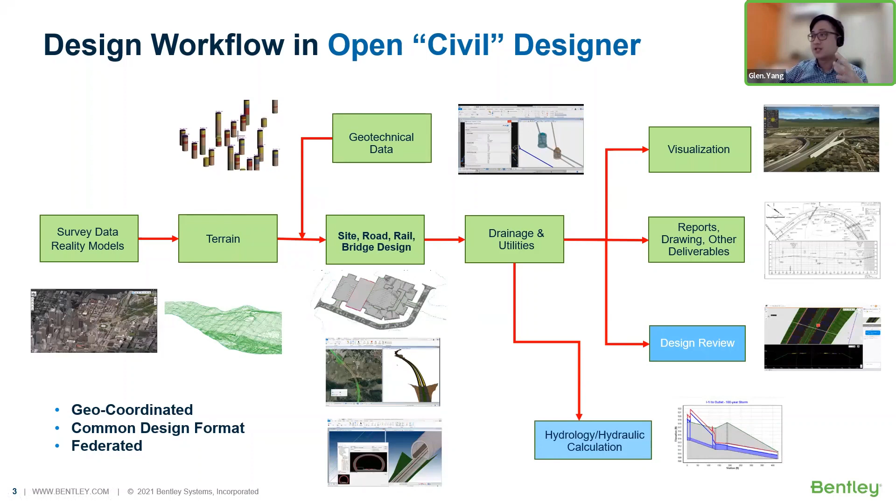But from there, of course, it comes into visualization, where you can use things like LumenRT for rendering, pretty fast rendering. We will be able to create reports like drawing reports and other deliverables that have a bit of automation inside, which really eases the workflow of everything. Design review, and for drainage and utilities, some hydrology and hydraulic calculations.

Okay, so maybe I'll just talk about what I do specifically and the workflow of drainage and utilities. So once the road terrain has been created, utilizing the corridor models that we have already designed based on the site, road, rail, and bridge design, I will be able to add in some utilities that can be imported through 2D or 3D context line strings to create them into utilities.

Next is to create a drainage network design. From there, we can do some hydrology and hydraulic calculation. We not only analyze the drainage network design, we can also let OpenRoads design it for us. So if, for example, a certain pipe is at full capacity, does it increase the pipe sizes? Does it reduce or change the inverts of the pipes, which will allow us to extrude the nodes out, the 3D portion of the nodes?

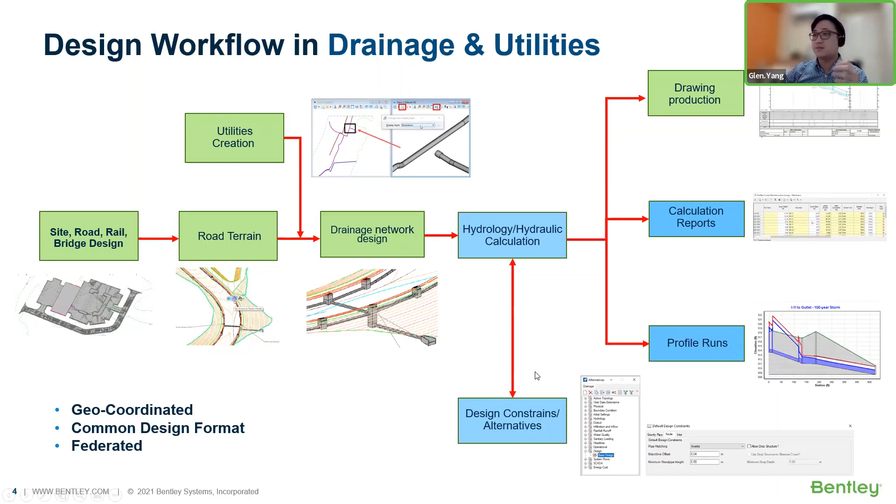So it's pretty interesting when we look into the technologies of this type of workflow when it comes to modeling itself. We can set specific design constraints to change the way we want the entire network to be laid out for us.

So with the drainage network, it's pretty simple to create. That includes adding nodes and conduits, and this utilizes the workspace that we have, sort of libraries that you can add on the spot once you have downloaded them. From 2D inputs, we will bring out 3D outputs as well, and they can be extruded from the middle line. The cells have a smart technology where they're able to populate and extrude themselves.

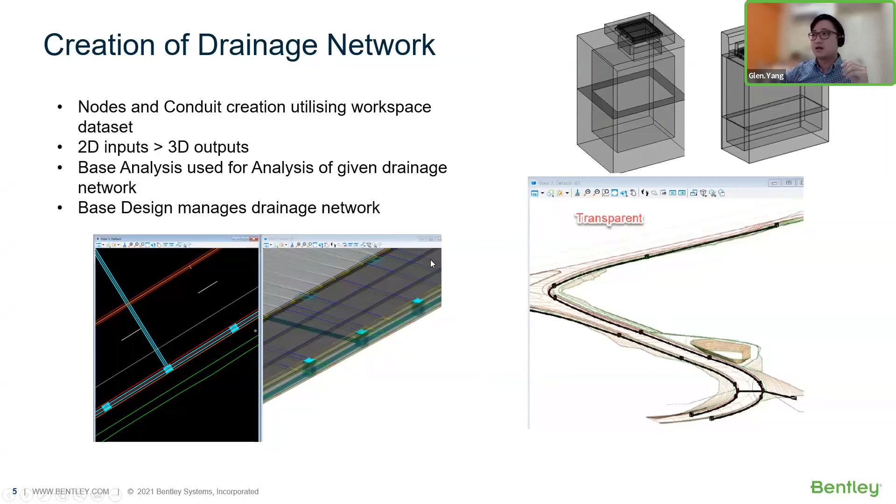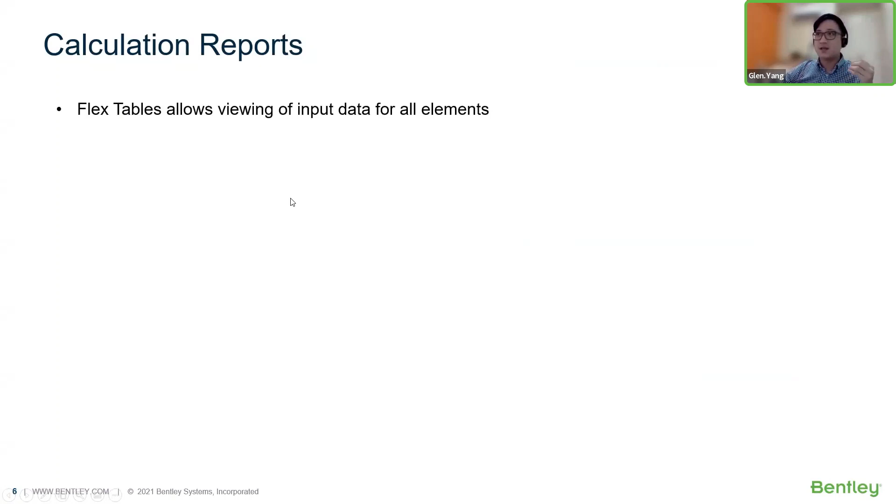Yeah, sure thing. Okay, so for drainage and utilities specifically, we are able to create calculation reports, pretty simple, and they are all populated out for us. We don't even need to add any additional input to them. We can also control the entire drainage layout through these tables. So it is really interesting how the software we have is able to manage your information and lay it out, and there are different ways and workarounds where we can handle that information and edit it.

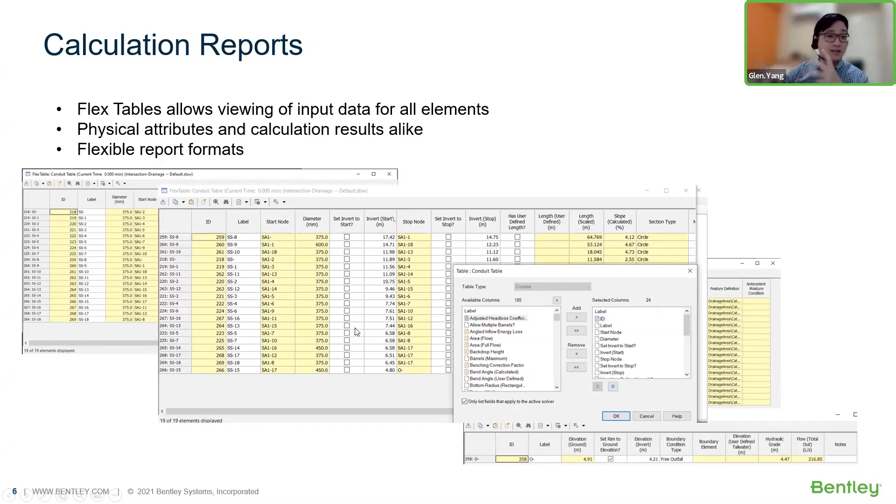Okay, so this also talks about drainage profiles, which OpenRoads Designer can create. You can run the entire analysis and see the energy grade line and hydraulic grade line, HGL, EGL, and once a layout has been created, you can immediately create an engineering profile just like that.

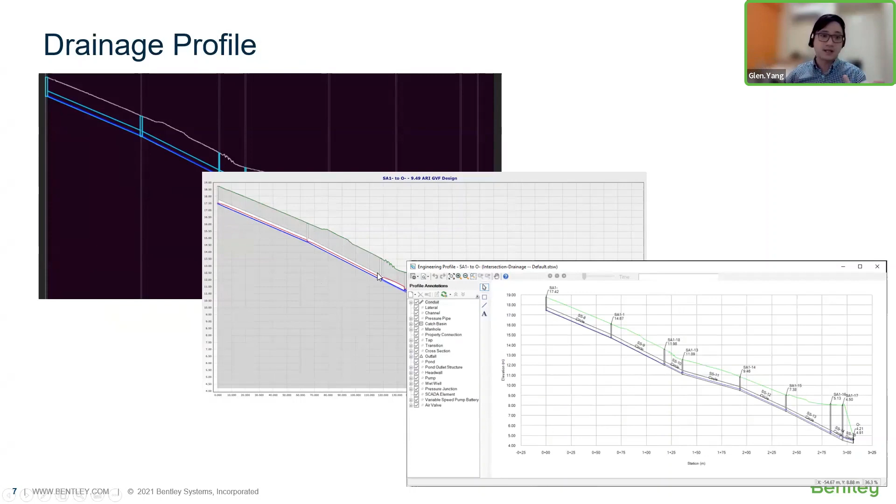So drawing production is something that the civil products we have really specialize in, and they really ease the workflow in terms of drawing production and deliverables. So for example, we have things like plan, profile, and cross-section sheets.

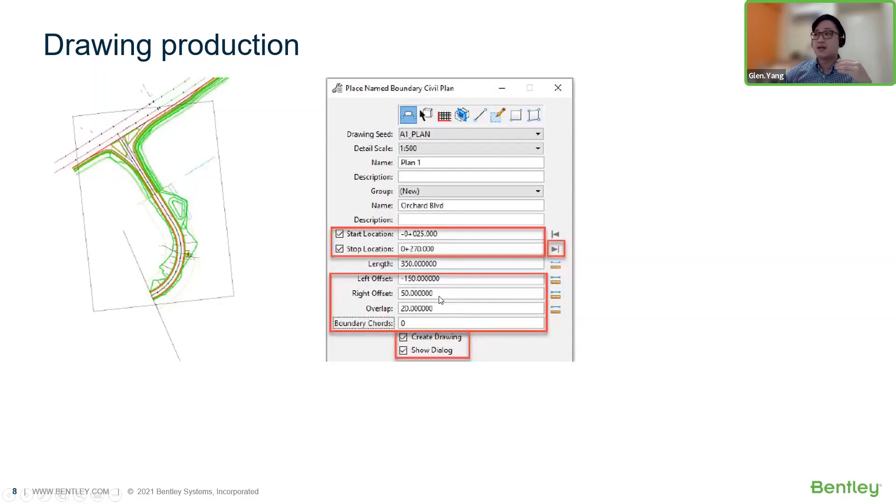Simple as that. So for drawing production for civil plan, we are able to populate this along the entire alignment. So if we have an alignment that's probably a few kilometers long, we are able to populate and create sheets out of them, out of intervals of the specific length that we've chosen. And if we want to have any overlap and any additional settings that we want to place, we can do so. So once that is done, it immediately creates and places it into a drawing sheet for us.

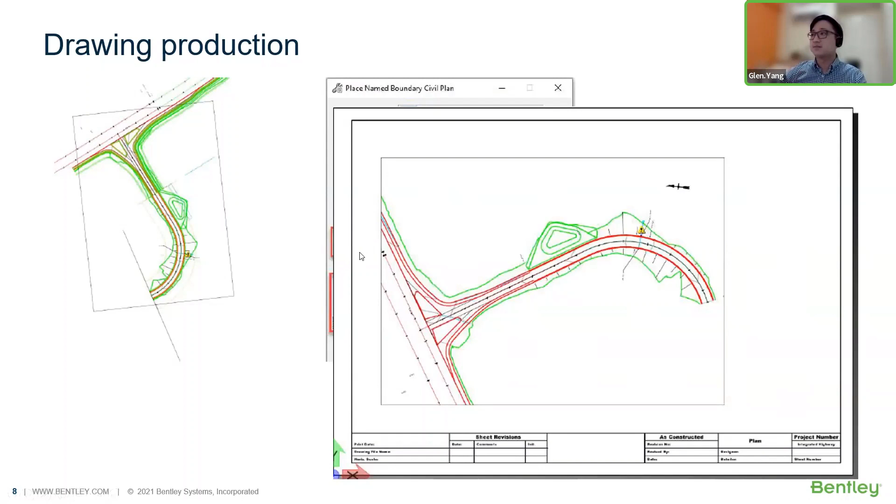And this utilizes templates that are existing in the data set, the Singapore data set that was created, and any other data set that is created. So same goes for drawing production for profile. We are able to pull in things like the pipe name information, the flow information, capacity, diameter, slope. So all these types of information can be configured, and it is pretty flexible, but of course it takes a bit of a learning curve to really fully understand it.

But the good thing is, with this we can automate this. We do not have to manually put in our edits, while still having the flexibility, if we want to add any other annotations, we can always go to the modeling side of things, and we can add in another set of annotations. We can redo some of the background drawing blocks as well. So it's pretty flexible in that sense. And this applies to the entire length of chainage, not just one sheet or two sheets. You can make a few hundred sheets if possible.

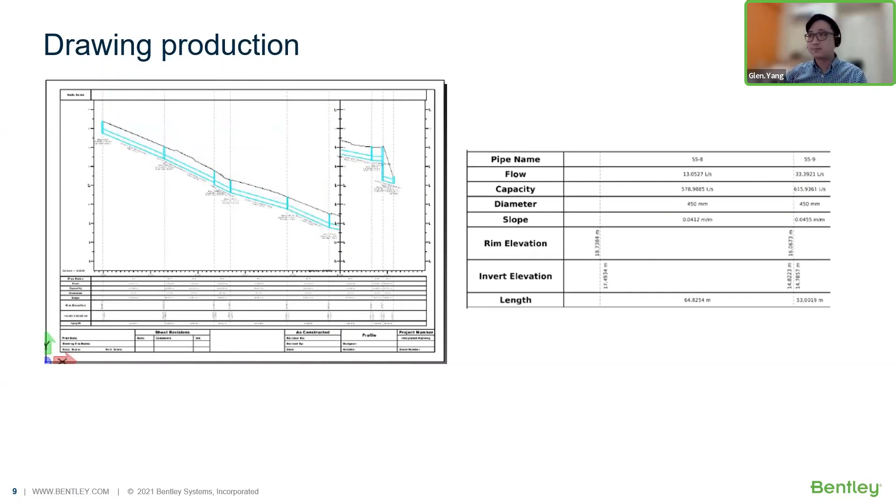So with that, that is just a bit of overview of what I do, and the technologies and the products of the modeling softwares that we have. So I'd just like to end this by saying that choosing to work in a software development company provides a well-rounded experience with working with different consultants, because I get to know their workflows. I get to work with consultants, government agencies, and I'm able to share the needs and some of the information and technologies within different countries, because we are so international. And because of that, I'm also able to take part and contribute to some of the projects.

So currently, I'm in charge of Australia and New Zealand projects, where I will have sessions where if they need my help, I will be able to review their workflow and some of the files that they have, so that I'll be able to improve on that and maybe solve some modeling issues that they may come across. So what I want to put across is there's a vast variety of opportunities and information that you can get while starting out, without going straight into consultant and construction, because I'm able to take part in their projects, and I can learn along as I go.